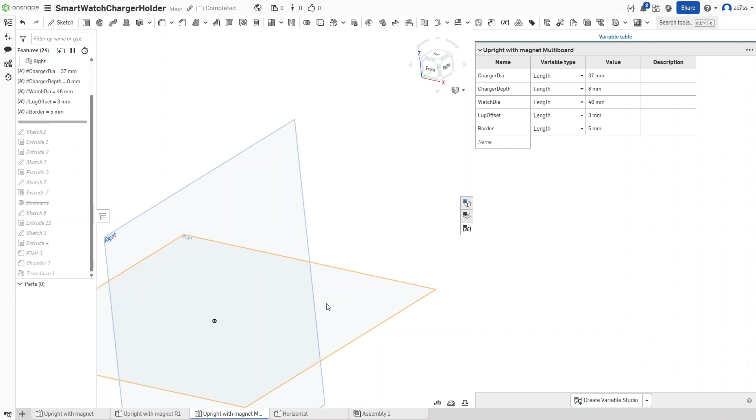Alright, I am going to be going through the steps I did to create a smartwatch holder for my multi-board. The first thing I did was I took the measurements for my smartwatch charger: charger diameter, depth, watch diameter (not really using that), lug offset (that's being used somewhere), and the border, which is the area around the thing.

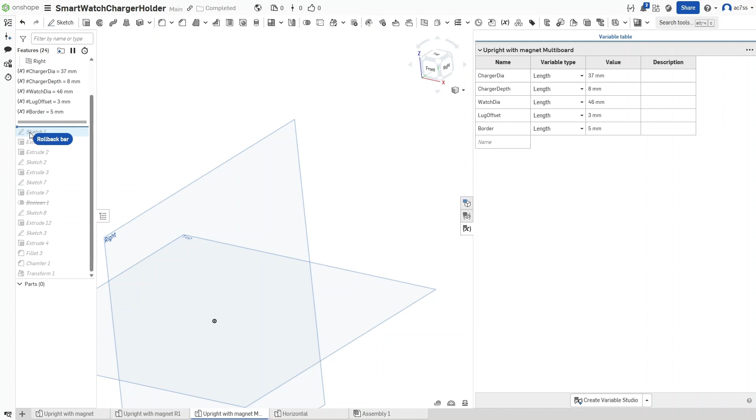I find it much easier to put the sizes in here, and then when we move to the sketch, you'll see my sketch here. If I unhide it, we'll look at that. So I started with a circle, and the diameter of the circle is the charger diameter, which you'll see right there. Charger diameter is that circle.

Then I used a guideline creating the watch diameter circle as a reference, and then I made another circle adding the border around the watch. So I had 3 circles here. I brought a tangent down here. I created the gap for the charging cable. All this time I'm only working on one side of the image, and then back up to here.

Added the semicircle, and this was an arbitrary number. It just gets it so that there's enough room to pass through the charging cable. Then I used the mirror function. I selected the mirror line, which is the center, selected this and these, and it copies all of those over to the other side.

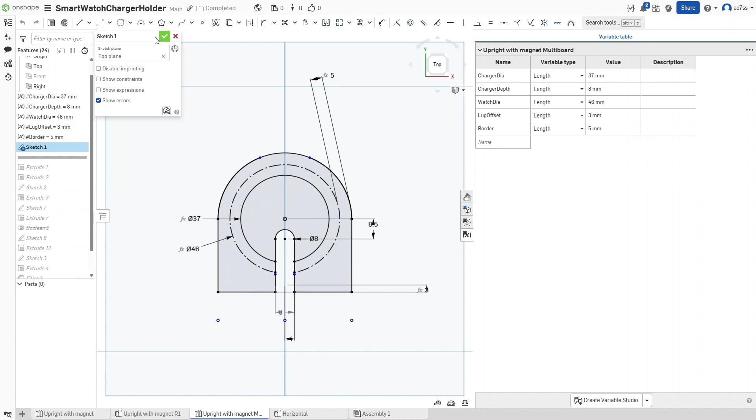With that you end up with a drawing. You know that it's a correct drawing because it's grayed on the inside, which means it's a solid space. Once we're done with that, I extrude it in 2 forms. First, I extrude the whole back plate, 2 millimeters. It's usually plenty. It's not going to get much stronger making it any thicker; it's usually infill after that point. So 2 millimeters thick.

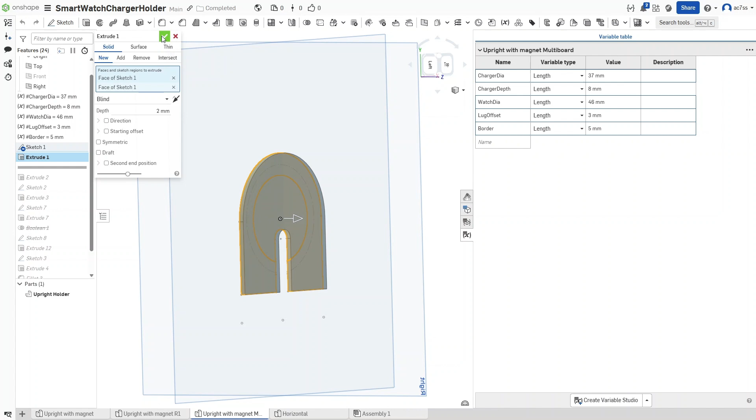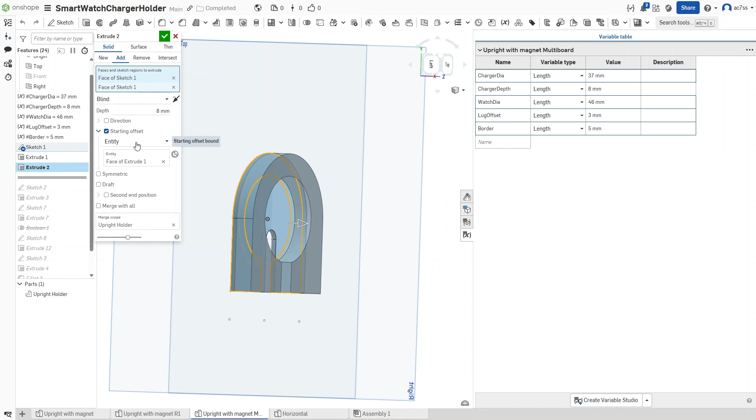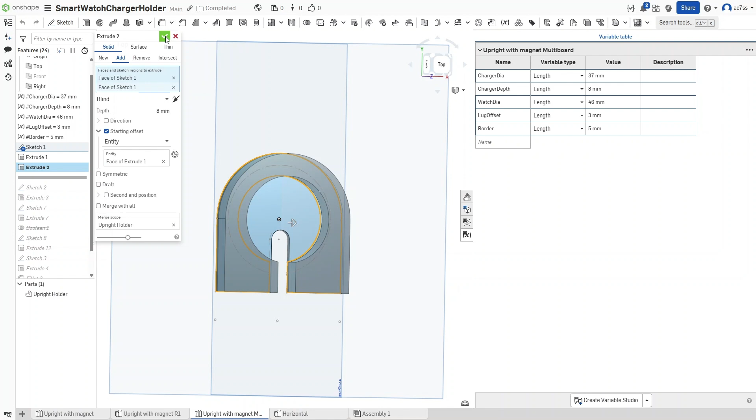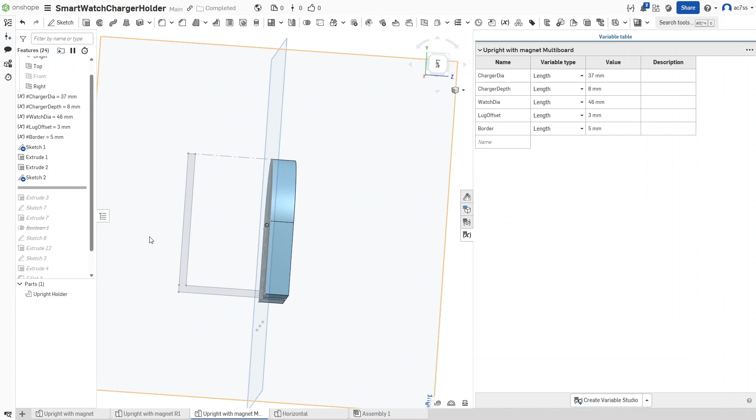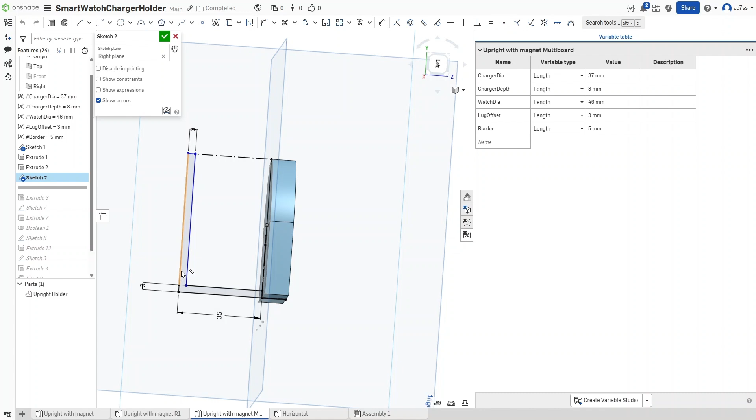Create a second sketch. This sketch is on the right plane, and it is just the bracket. It's fairly simple. It's just deciding that those are going to be 3 millimeter thick panels, 35 millimeters from the back of the plate to the panel I will be securing it to, and I use the trim tool and cut the line here. These are just 2 corner rectangles stuck together.

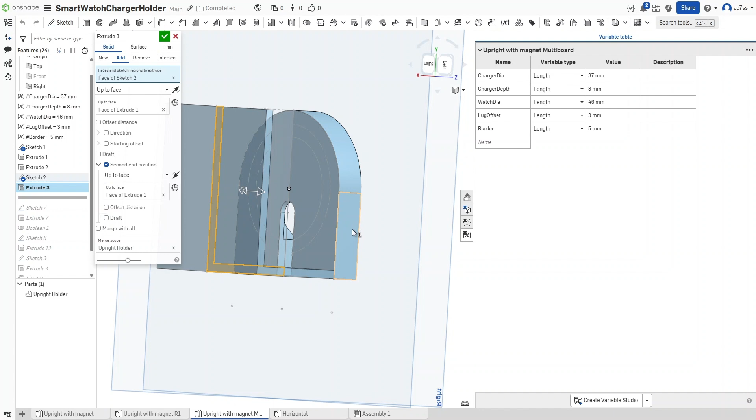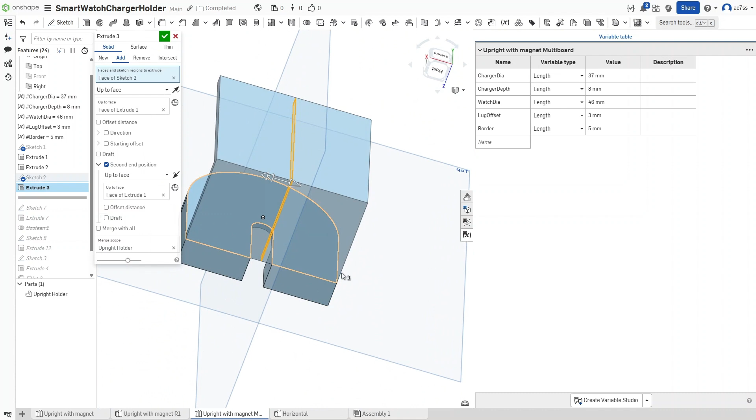Then I extrude that, and for the extrusion I just use up to face. I chose to extrude up to this face, and then a second end position up to face, flipped around and put it up to this face. Let's get rid of these other sketches here. So I extruded them up to the face on each side. In the shadow here you can see that it's going to be the same width and full size on the back.

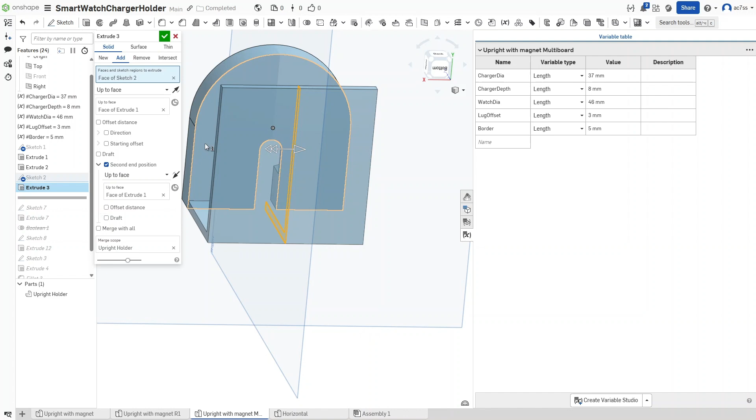There's always more than one way to do these things. I could have extruded another section from the original drawing, but I did not want to do that. So there's my extrude. I have my bracket, place for the charger, place for the cable a little bit. We're going to take care of that here. I'd like to add a little bit more.

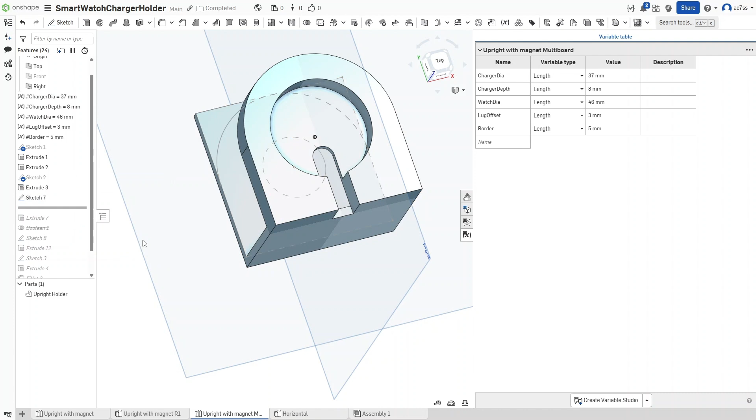Okay, I guess the next phase is we're going to cut out the excess from this back panel, which we couldn't do earlier. So create a sketch using that panel, and it is using midpoint to line up with the disc. Actually, no. This disc is actually a projection.

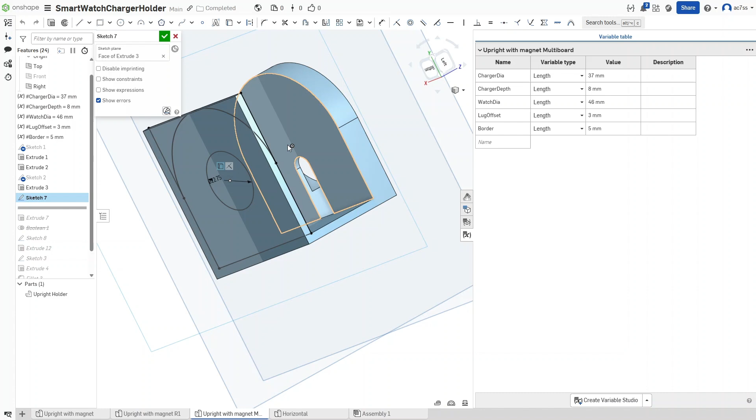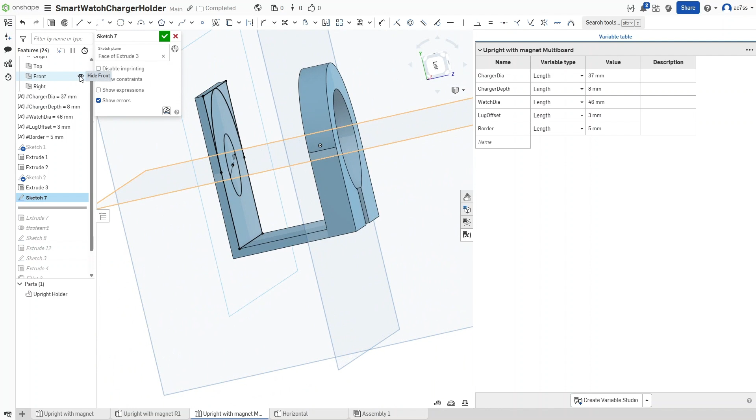The center point of this is a projection of the origin of the system. So everything is using the same origin point. If we turn on the front, you'll see that everything is lined up with the origin point here. And the center of that circle is also lined up with that. It makes it easier. Get rid of some of these extra planes.

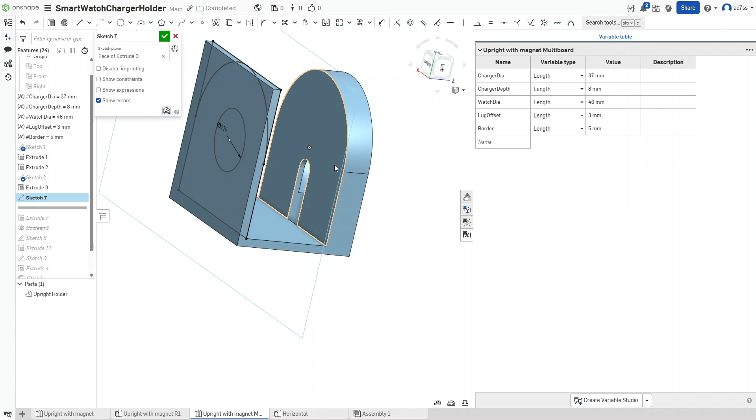So I created this drawing here. The easiest thing to do is when I opened up the drawing, I used the use project, and I projected as a guide this wall, and I projected this panel back here, the entire back panel here. And then I was able to hide the whole thing, and able to work in the middle of that, creating a center point circle using that origin point.

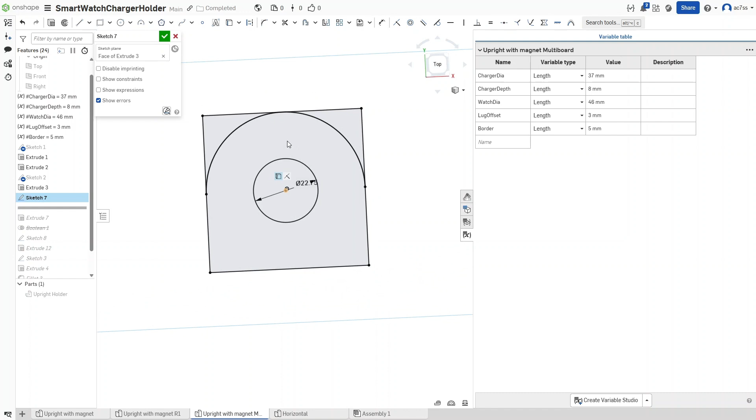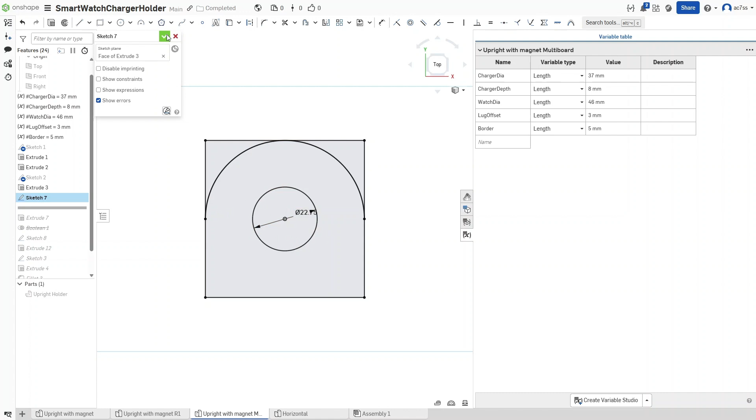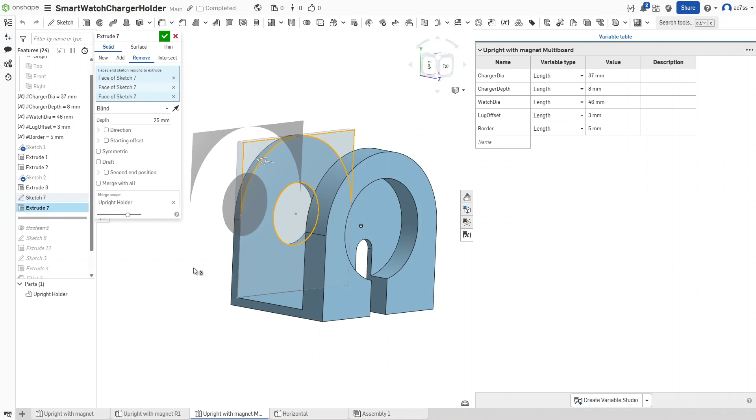Then we'll show the upright holder again, and we just extruded. Chose those 3 portions of the drawing. Extruded them through as a remove, removing them from the upright holder. I could have made that, instead of a blind 25, I could have made it an up to next, which would do exactly the same thing, or up to face, and then chosen the face I want to cut it to. There are many ways to do the job in these. So we've got that cut.

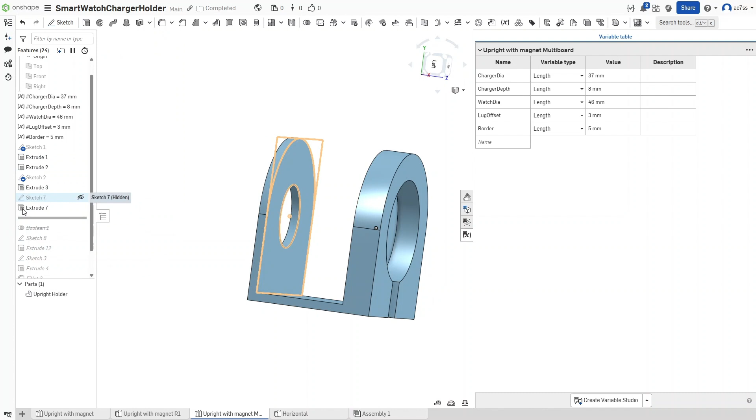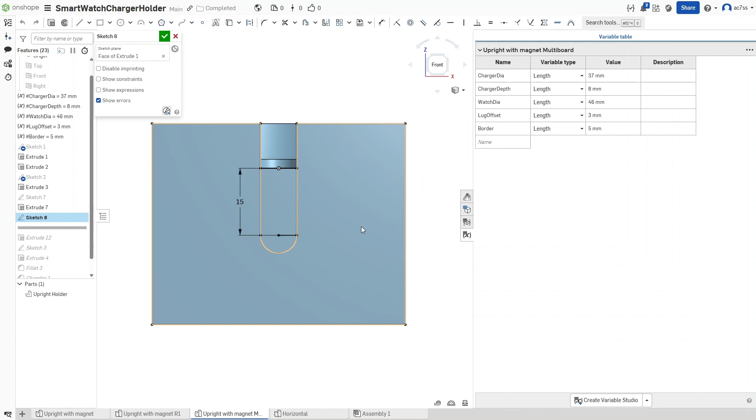We'll hide that drawing. I did something else earlier, so I did not need this Boolean, so I'll delete that. Sketch 8. This is where I made the rest of the cutout for the cable to go through, clearance. So once again, I chose the face. It's this face here of the block. That was my drawing surface.

I took and copied over, used project, the entire face, and then I just added a point corner, bring it from there to there. Gave it a distance of 15. Arbitrary. I thought it was aesthetic. Then I did a 3-point arc. Selected the midpoint of this line in each side, and to make it easier I used the trim and deleted one side of that line.

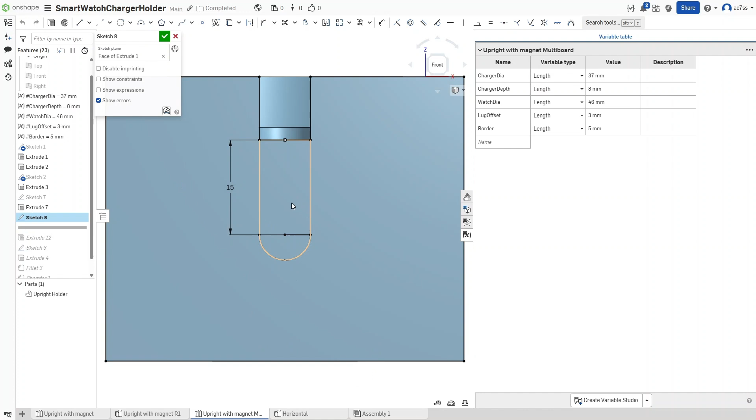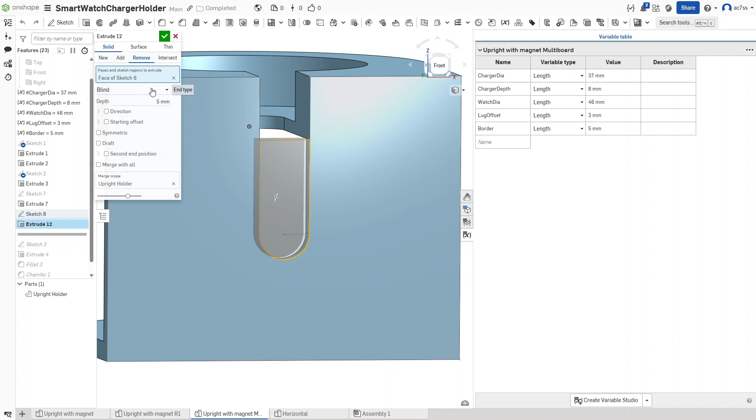So now we have, when you mouse over it, you'll see I have one continuous drawing all the way around, so that makes that a form. Okay, now I'll do an extrude. And you can see on the extrude, I just selected that section. Once again, I went blind 5mm, which I knew would be enough to go all the way through. I also could have used up to face or up to next. But anyway, it cuts it out. And you end up with that.

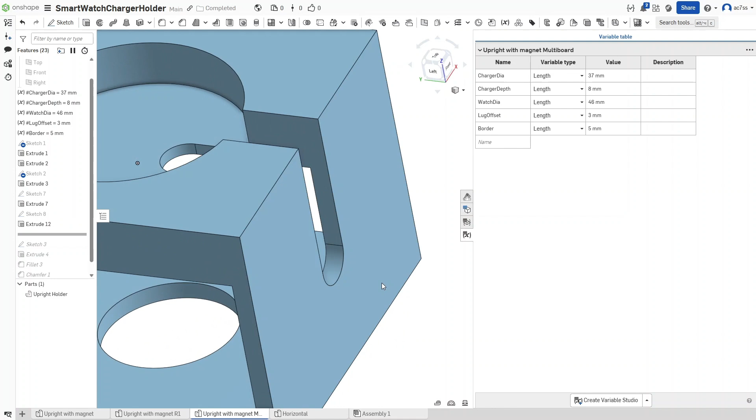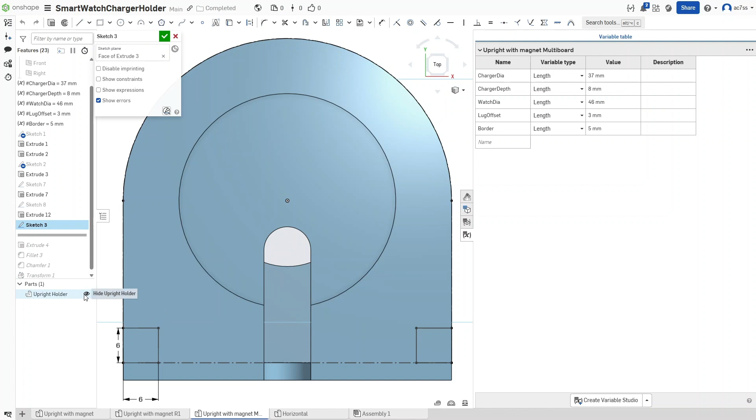After this, I decided I wanted to add some more supports. So once again, I chose the back plane here. And we'll split this, make it a little bit easier to see. So I took this, projected, didn't even need to project on this because I chose this as my back plane. I could have done this earlier in Sketch 7, but I didn't.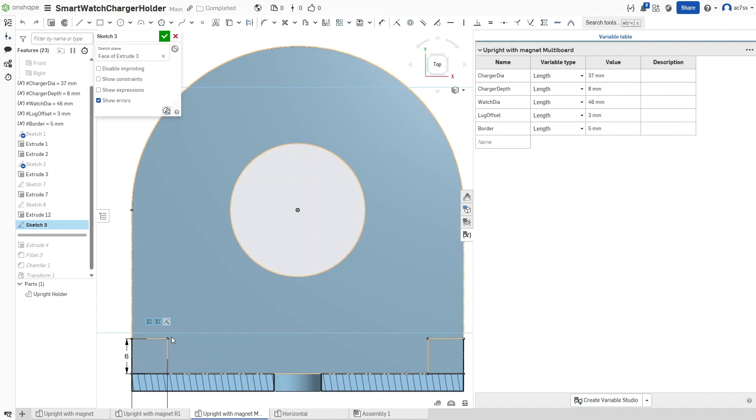I just used corner rectangles, draw it from the corner, give it a 6mm measurement in each direction, arbitrary number, just wanted to get some strength to it. And then I used the mirror again, choosing the right plane as my mirror, and then just selecting that to copy it over to the other side.

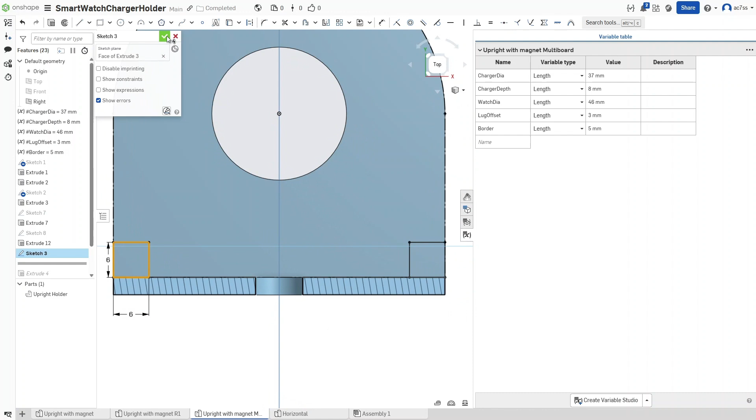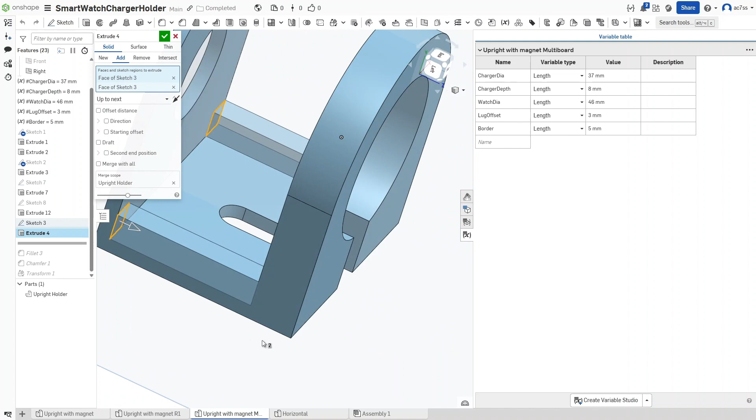Okay, now that we've done that, I move this down and I use the extrude function again. This time I'm using up to next to choose both of those faces in the drawing. We'll turn off the section view. You can see that would bring it all the way to the next part. So it gave me the bracing there.

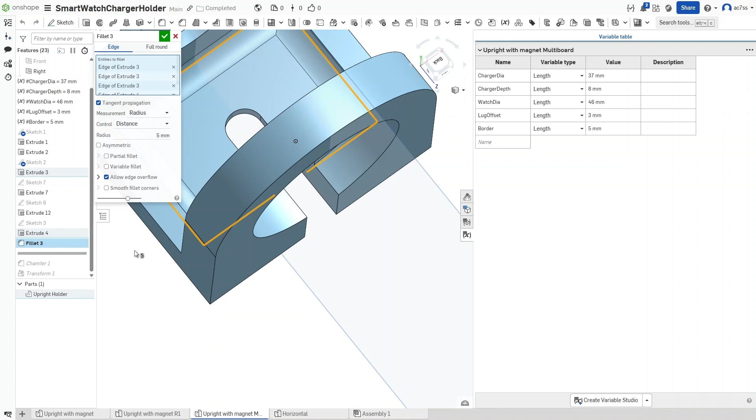Now it's just to make it a little bit prettier. I had some fillets in the back that gives it strength, especially on the top and the back portion here. On the sides here, it just gives it a little more aesthetics. And those are, I use a 5mm radius for those. Another arbitrary number. And you'll notice that goes straight up to the edge of this cut. It doesn't cut into it.

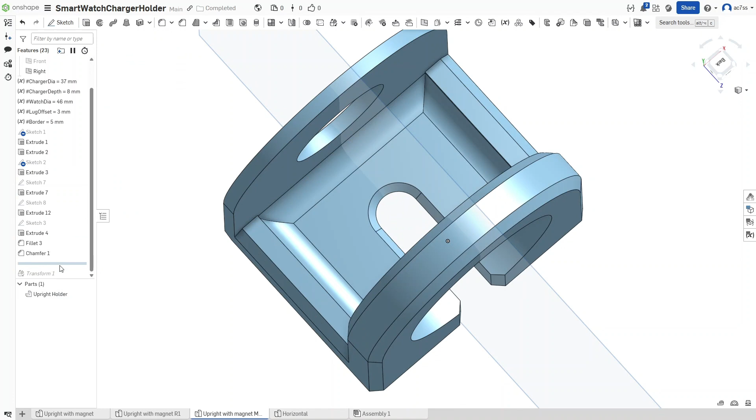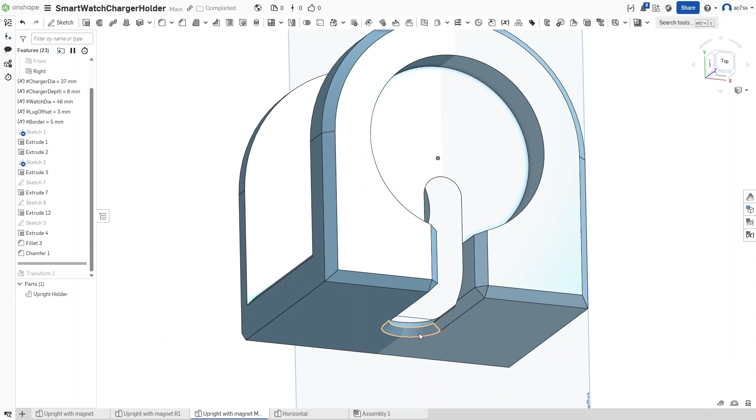I'm going to add some chamfers. Chamfers are different from fillets. Fillets are round, chamfers are triangular. The straight lines are much better when it comes to printing. I've decided that I'm going to print it on this surface here, which will reorient that later. So I want anything that's against the surface to have a chamfer on the edge, as that is better than a fillet. The chamfer doesn't have overhang problems.

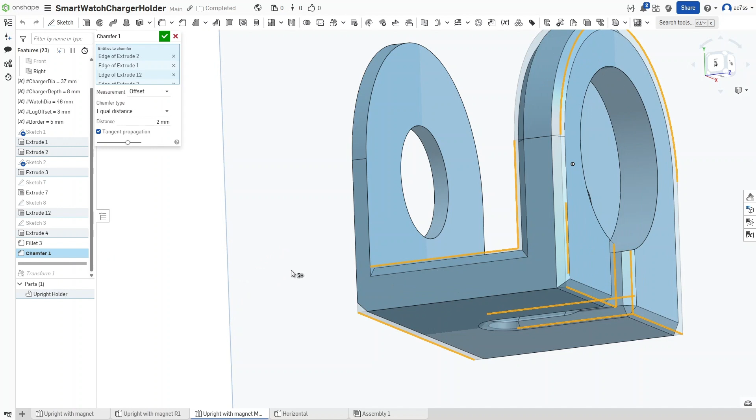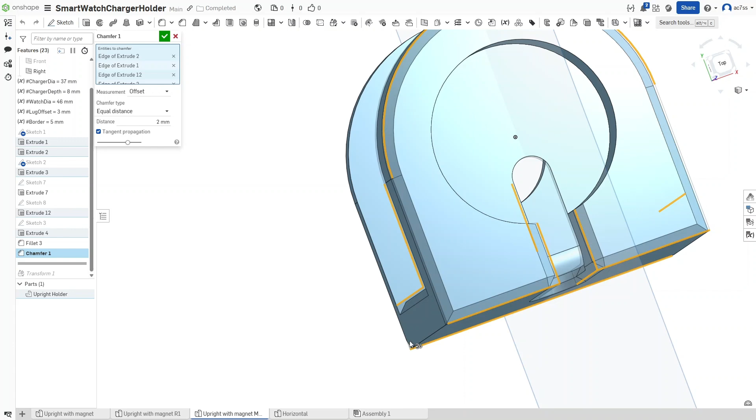So in the chamfer, I chose the edges here and here, and here. Choosing this one automatically traces it all the way around to the other side. That's part of the tangent propagation. Same thing, chose the front, and it goes all the way around. Choose bottom two edges here, the edges here, here, here, and the ones on the inside here. I just only had to choose one of those because it transfers around.

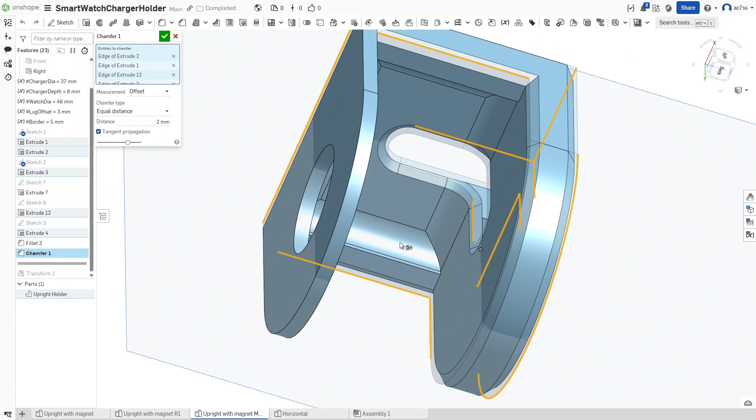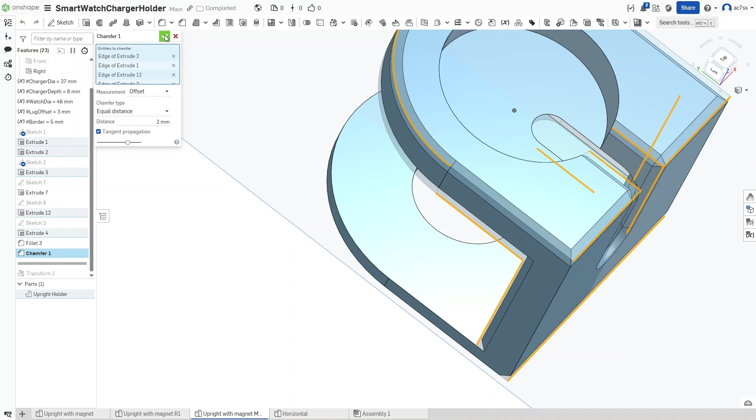I did not do anything on the back section here. This is going to be flat against the board. I don't need to relieve that at all. And I decided these are only 3mm thick, I don't need to do those. So those are 2mm distance chamfers.

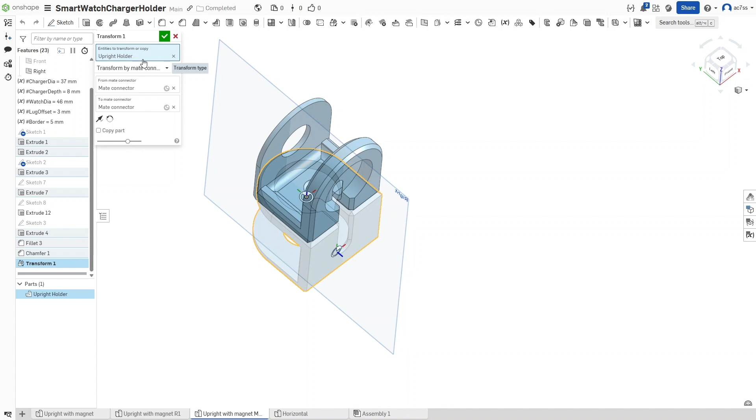And then to finish it off, I transform, and my transforming I generally do using mate connectors. So I choose the item, the upright holder, transform by mate connectors, and there will always be a mate connector on the section that you want. So you'll choose a mate connector on the part that you want on the bottom, which you'll see right here. I just chose a random one. It could have been any of these, as long as that blue part is sticking out. That's the only thing that really matters. I could have used any of these, but I chose that one.

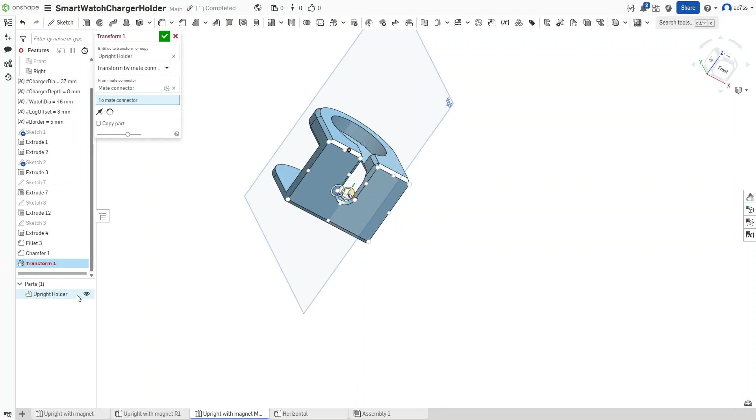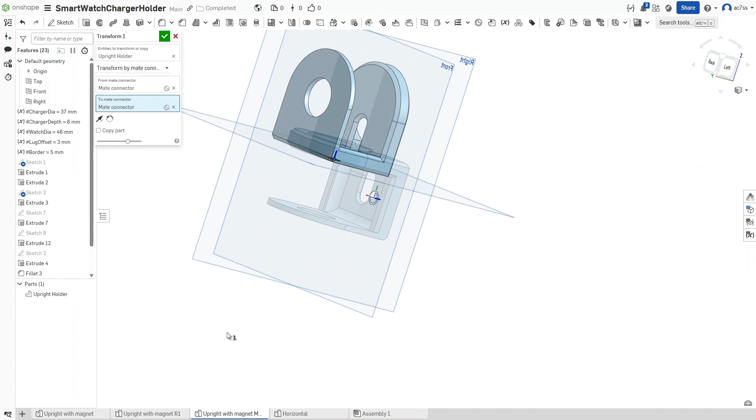And then I need to choose a to connector, and it's easier to find it if we close that. That's going to be here. We want to make sure the top plane is on, not front. Top plane is the one we want to see here. So you want that with the blue part up. We'll unhide and see if that's the direction we want it. Yes, that is the direction we want it. If it was upside down, you use the flip primary axis.

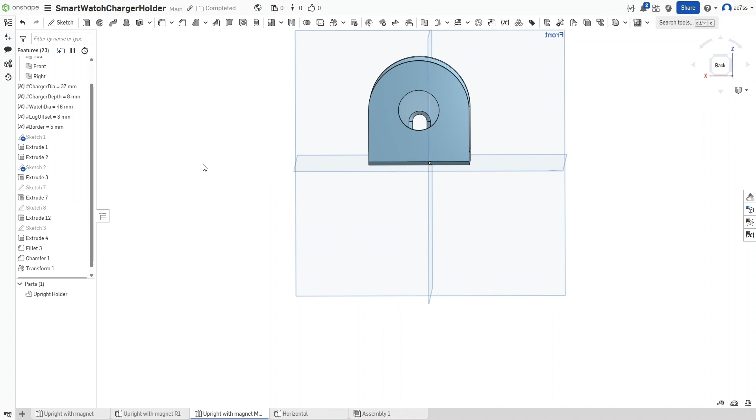And once that's done, this is always a courtesy to people who download the file, so that when they download the file, they don't have to do any reorientation. The file is already oriented for printing. And that's it.

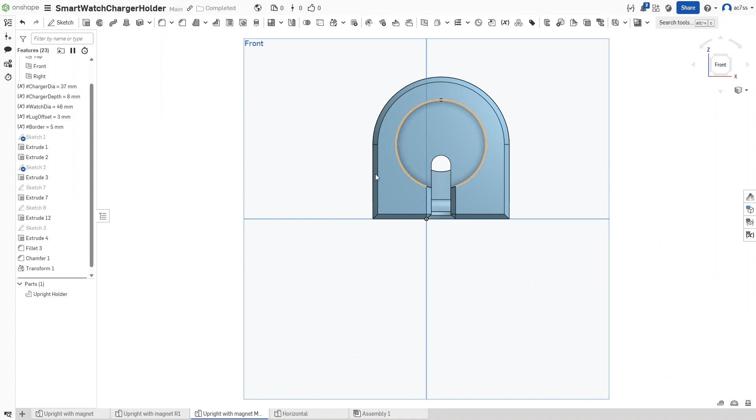I'll throw in a quick time lapse of the print, and you'll see that printing. I also printed the large screw connector at the same time. It took a couple hours to print, but I start it and go to bed.

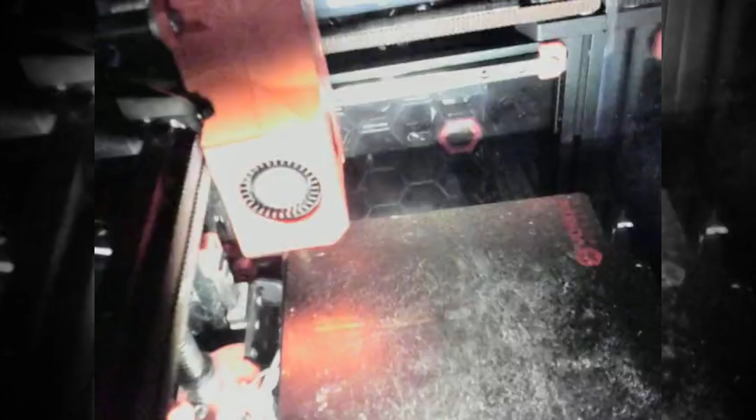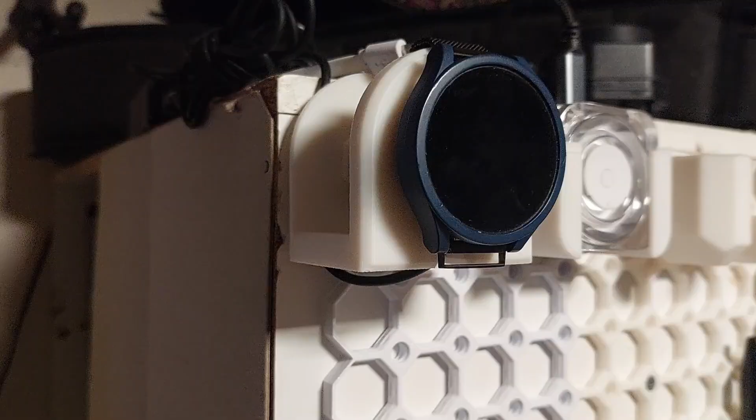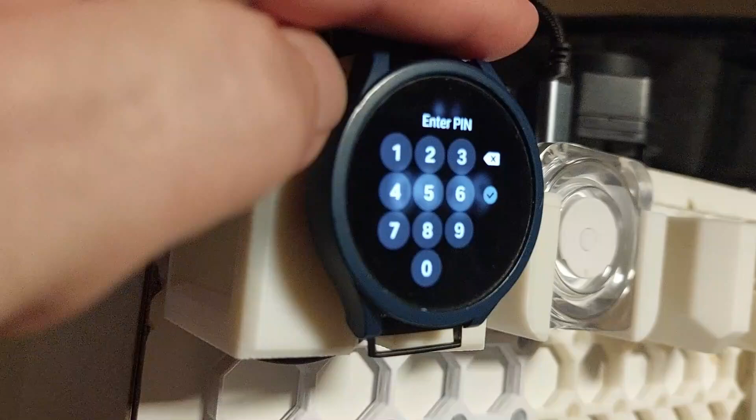Alright, and here we go with the finished product. Installed on the board. My watch is sitting on it, and it easily comes loose. You can see I set it in this orientation. It can go in any orientation. The watch easily snaps onto the magnet back, and it's held in place by some alien tape, and you can see that the watch is held in place sideways.